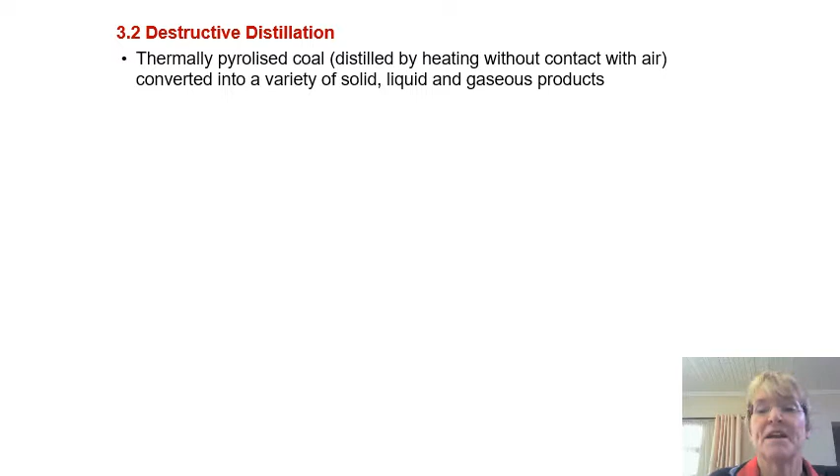Now in destructive distillation, the reaction is also an initial heating of the coal. The difference from combustion: in combustion air is included. Air blast is actually added during the process. In destructive distillation, the heating is done, but it's done in absence of air, so that you don't have any burning of the coal. Again, it depends on the types of coal that is used.

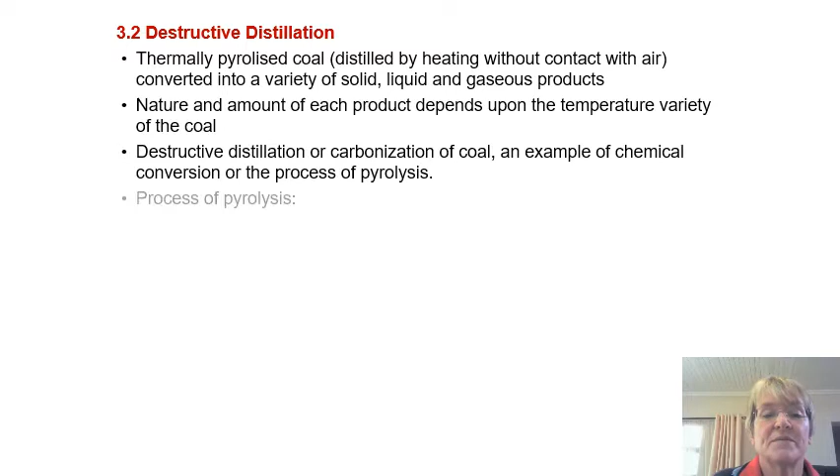Now, what happened in this process of pyrolysis? At first, as the temperatures start to increase, the aliphatic carbon-carbon bonds break first at about 200 degrees. Carbon-carbon bonds are not as strong as carbon-hydrogen bonds. Now, carbon-hydrogen linkage breaks only when you come to 600. So you see the heat is slowly increased, and as it is increased, there's a breaking down of the coal.

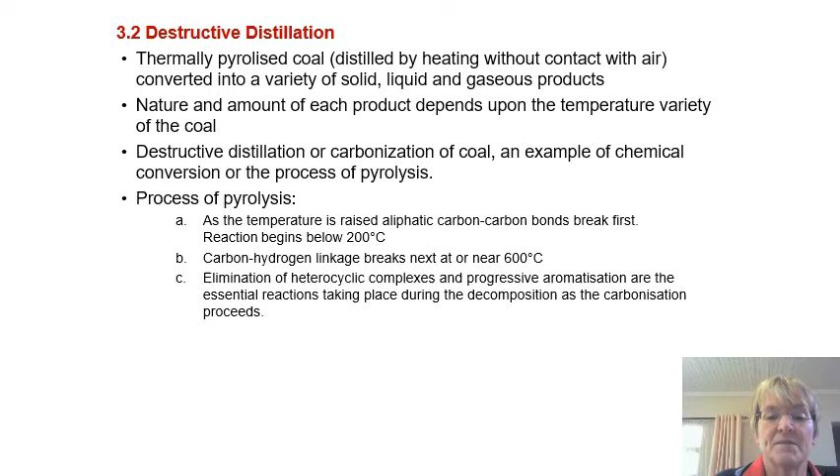Elimination of heterocyclic complexes and progressive aromatization are reactions taking place. So you have different products coming free, and as they come free and the temperature increases further, the weights of the products decrease because they become smaller and smaller particles, and these smaller ones then will have less weight.

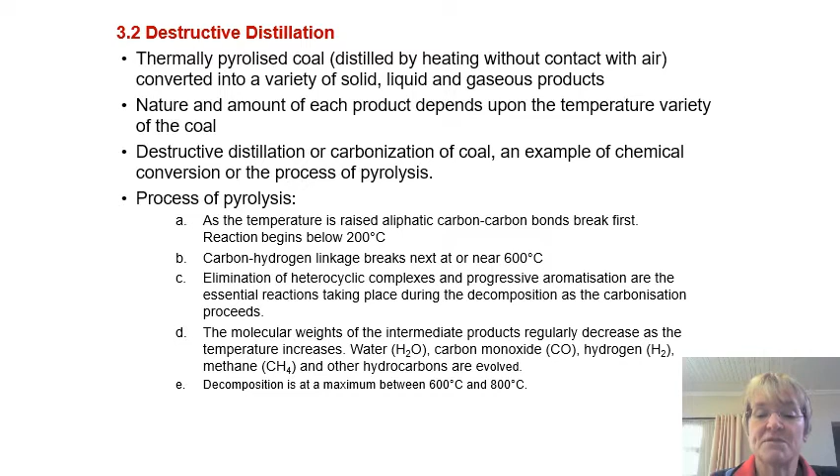And last of all, we have here the decomposition is maximum, where most of the bonds will be broken, or most of the smaller products will be formed between 600 and 800, and you are left with your coke, which is a solid product of the destructive distillation, and your tar, and then the vapors, the gases, which is mainly ammonia with some other impurities.

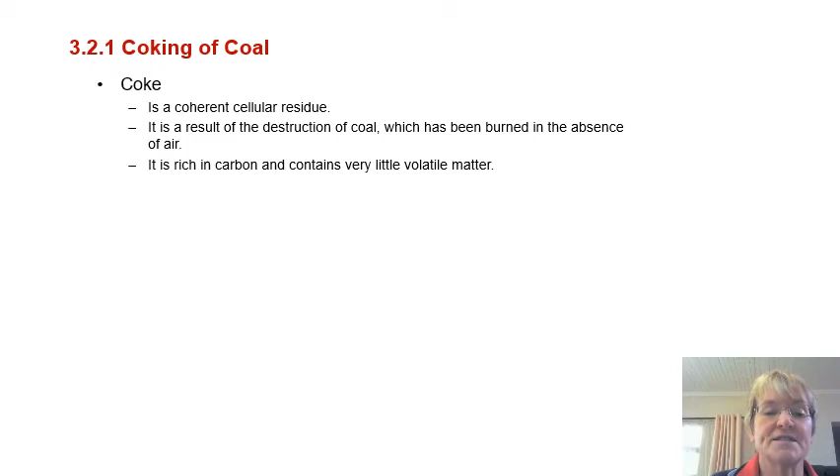Now, in coking of coal, what is the meaning of coke? Coherent cellular residue. It's the result of destruction. It's during this bond breaking that we just discussed that you are going to have the coke produced. Rich in carbon, contains just a small amount of gas, volatile matter. Now, a good coking coal must have between 20 and 82% of volatile matter. You need not remember the figures exactly, but it is good to take note.

It should not be too much, because if the gases are too much, then it becomes difficult to handle all the gases that are released during the coking process. And if it is too low a percentage, the coke will not have enough porosity, and you need the porosity for complete reaction, for better reaction in the metallurgical processes.

It must also contain sufficient ash, so it should not have too much, but it should have sufficient. The ash helps to decrease the melting point, so that the coal can be changed into this plastic mass that we refer to as the coke.

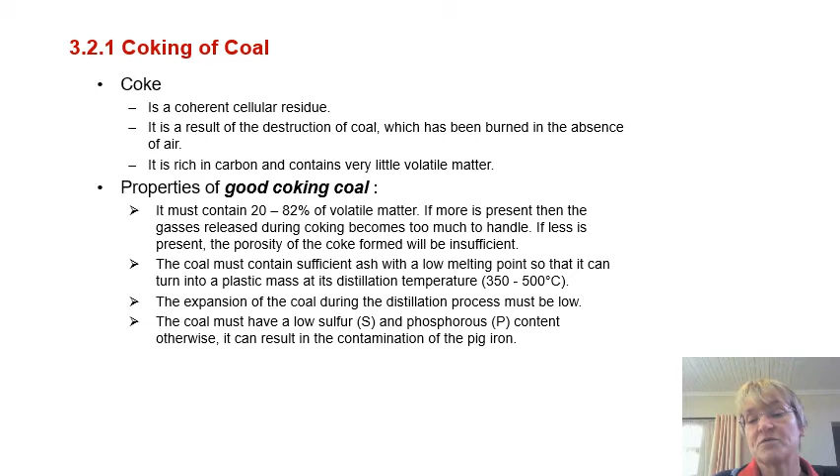The expansion of coal during the distillation process must be low, and it must not have too much sulfur and phosphorus, because if we then continue with this coke and use it in the extraction of iron from iron ore, the pig iron that is formed will be contaminated by the sulfur and the phosphorus. It's better if you don't have that.

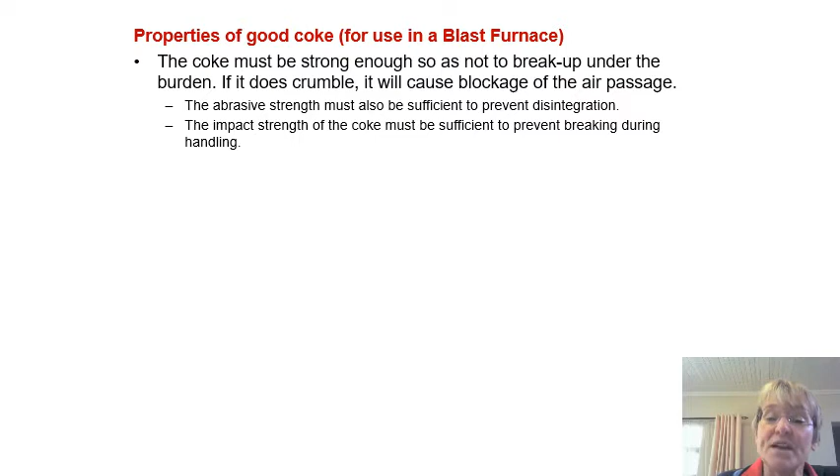Now, what are the properties of good coke? Coke that is excellent for use in the blast furnace for iron production. The coke must be strong enough, must not break easily, because if it breaks, you can imagine it's going to cause blockage of the air passage. The abrasive strength must also be sufficient. It must not disintegrate easily. The impact strength of the coke must be sufficient to prevent breaking during handling.

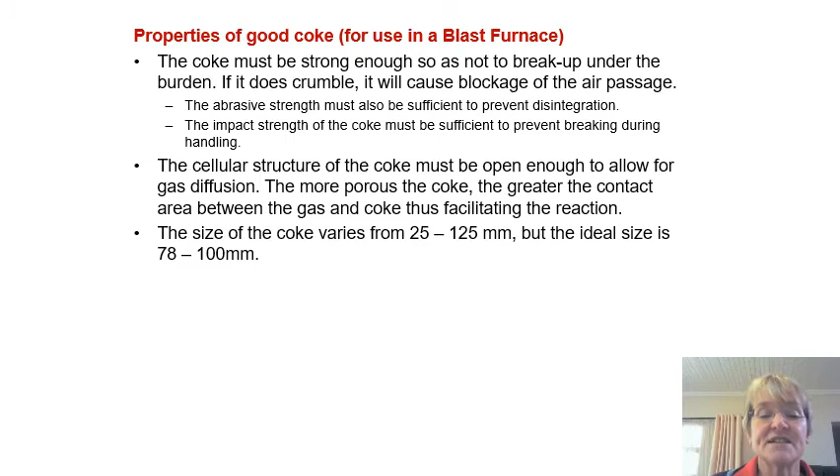And it must have an open enough structure. It must be porous enough, because the more porous it is, the greater the area of contact. And that is exactly what you want, because the coke is going to facilitate the reduction process. The ideal size is between 78 and 100 millimeters for the coke. And it is used in the blast furnace.

The basic reaction in the blast furnace: the coke is going to give heat, but it's also going to reduce. So it's not just providing the heat, it's basically two functions in the blast furnace, the heat as well as the reduction of the iron oxide to iron.

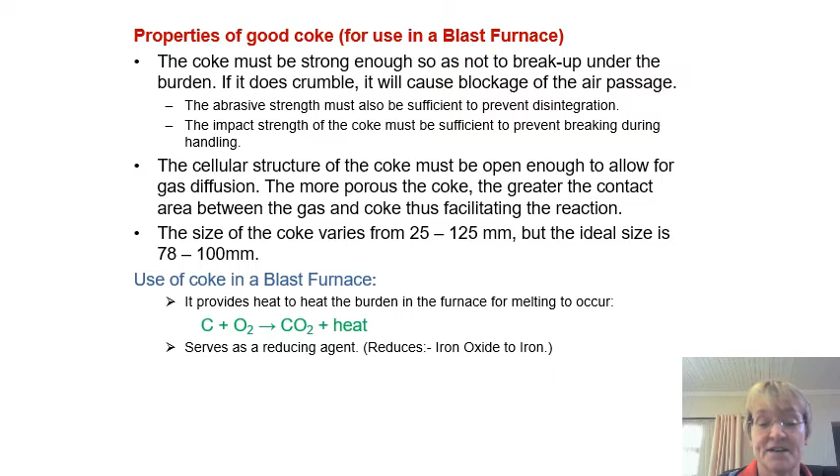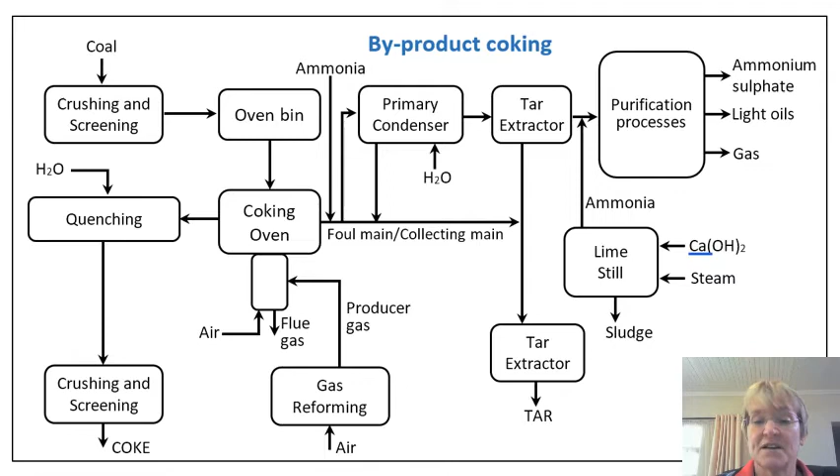The foul main they refer to here is the pipeline along which the waste gases and the tar and those things move, so that further purification can take place here. I think it will be best if you look at the theory that is discussed in the next slides, and then come back to this flowchart. It will help you to understand better what they have for us here.

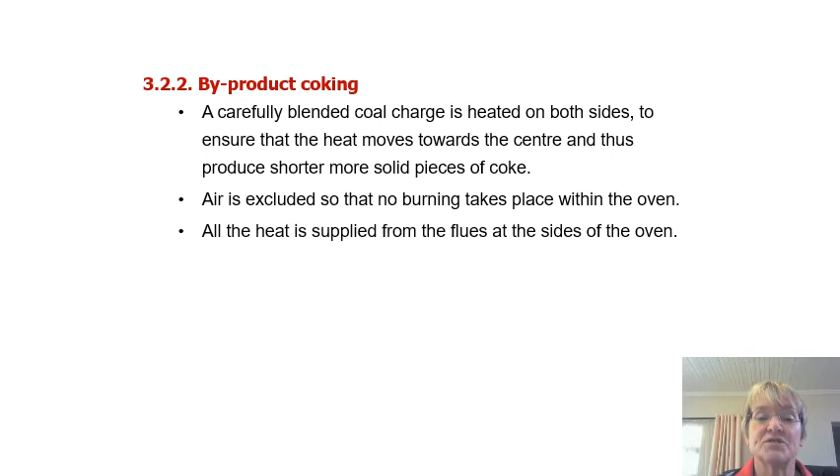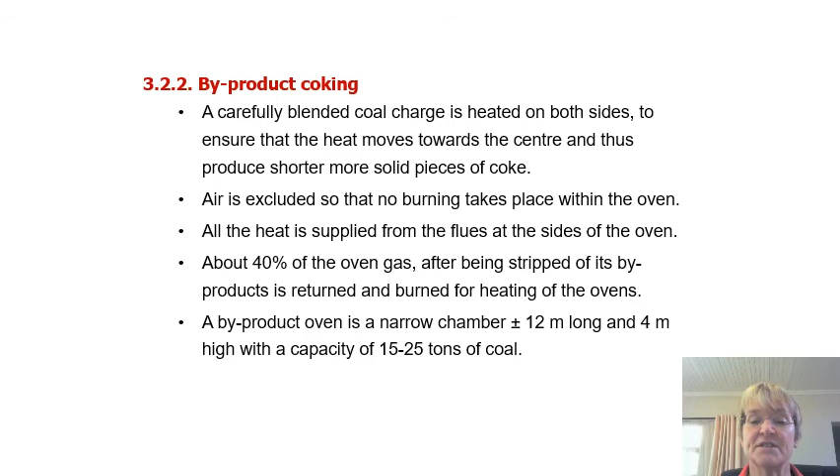Byproduct coking just explains to us the heating of the coal to produce the coke. Air is excluded, because there should not be any burning of the coal. The heat is supplied by flue gases on the sides of the oven. They give you an idea of what the size is and the fact that they work in battery form.

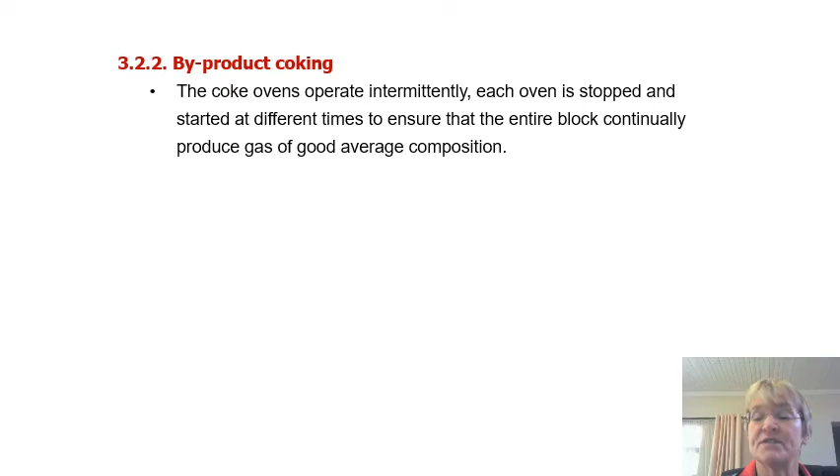The coke ovens operate intermittently. Each oven is stopped and started at different times to ensure that the entire block continually produces gas of good average composition. That is now this gas that we had on that flow sheet, that is transferred further and purified and separated.

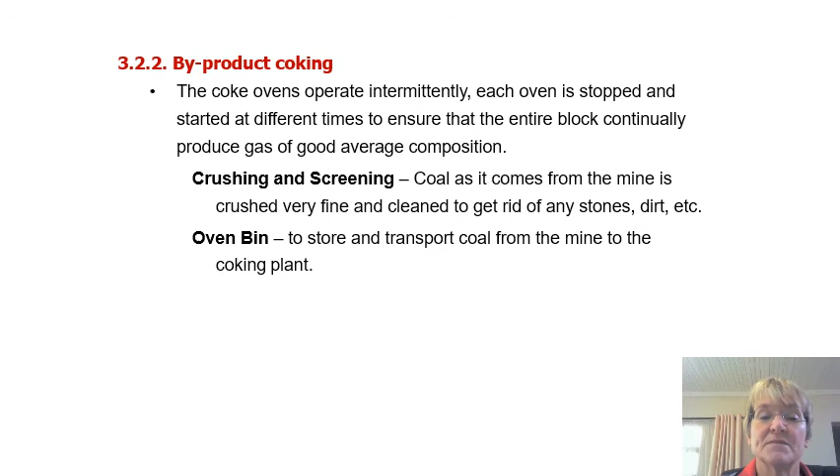The crushing and screening we talk about. In the oven, the heating, so the production of the coke itself. The reaction taking place inside there, as long as air is excluded, is destructive distillation.

And once the whole process is done and the breaking down is covered, and you reach that highest point where all the bonds are broken, then the oven doors are opened and the red hot mass is pushed out of the oven by an electrically driven arm, and it is inserted in water. Water is covering it. It is very hot as it comes from the oven, and if you just have it exposed to the air, it can ignite, and that's exactly what you want to prevent when you do destructive distillation. You want that coke to be used further.

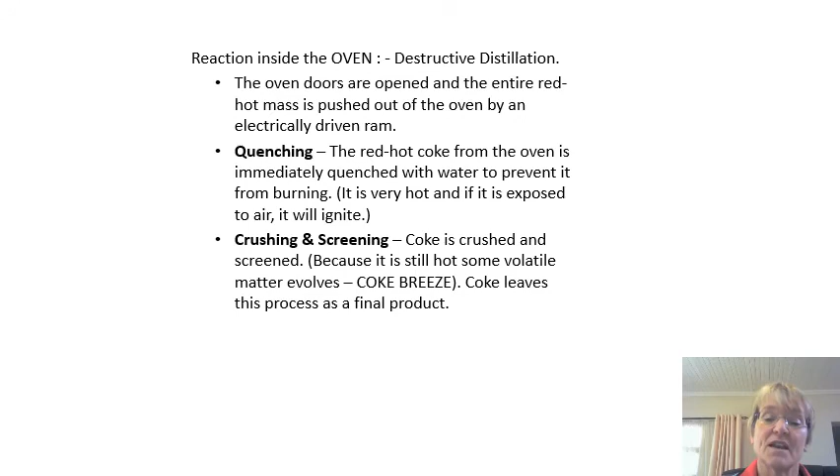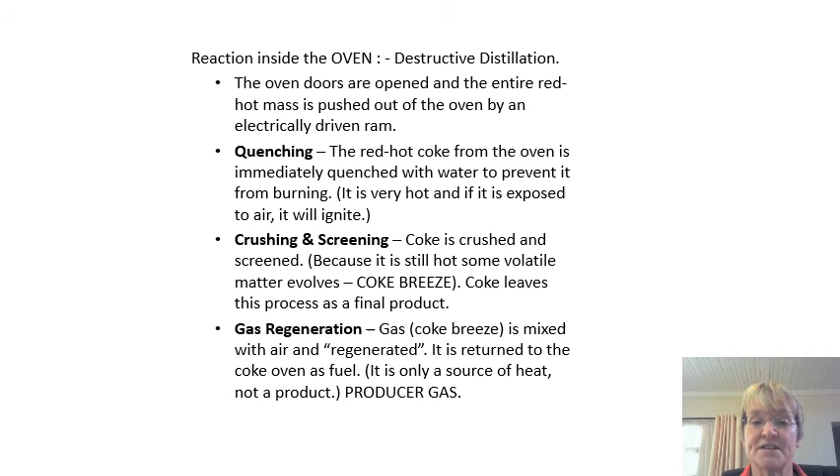They just refer to what happened during the crushing and screening and the gas regeneration. The gas regeneration we are going to have a look at now in the next slides. But that is basically where the gases are separated, and what is actually waste gas is returned as fuel, so that they can provide further heat during the process of the destructive distillation. So it's not really product, it's more a source of heat than anything else.

You see, the byproduct steps here refer now to what happened basically to the gas that comes free. The gas that is formed during the destructive distillation, and the liquid and solid, all of it is entering the collecting main. Solid from there is basically if there's any solid except the coke itself, because the coke is going from the oven directly to the quenching process, from where it's then going to the blast furnace or whatever other metallurgical process wants to make use of it.

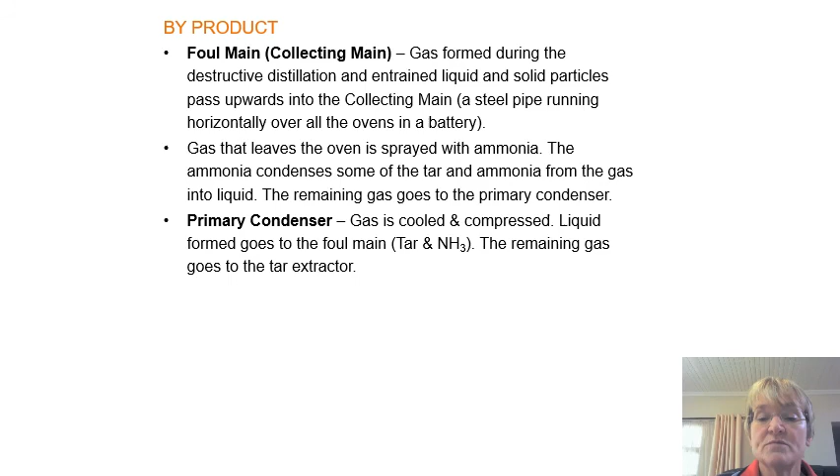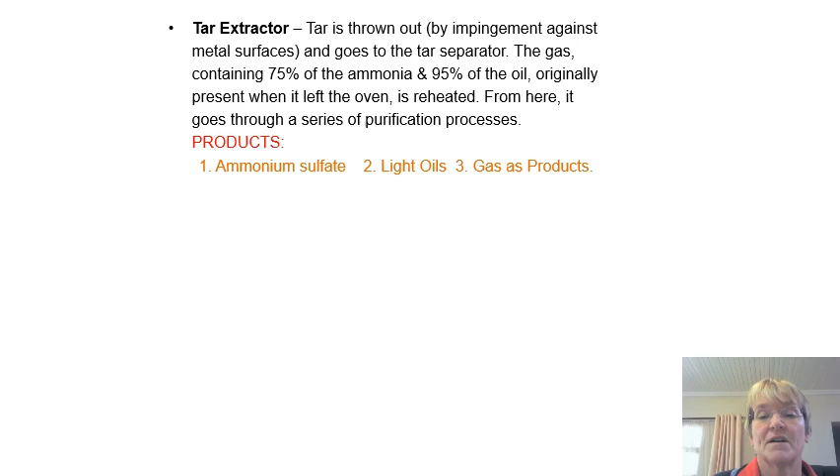The gases that are formed during the breaking of the coal leave the oven, and they are sprayed with ammonia, which condenses them, and in the primary condenser it is cooled and compressed, and liquid forms. You have your tar extractor that is collecting the tar. It is the liquid product from the coal during the destructive distillation. And in the tar extractor, the purification leads to ammonium sulfate, light oils, and gas.

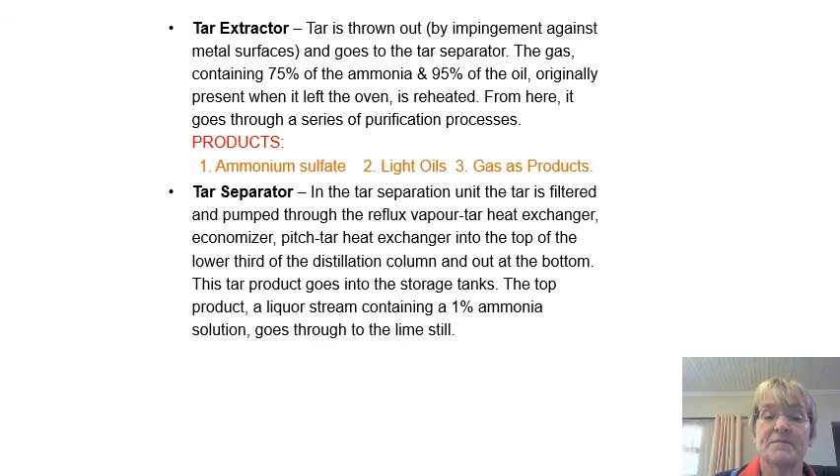We have the tar separator there, where you have further separation taking place, and the lime still, where either you have waste or ammonia that can be further purified.